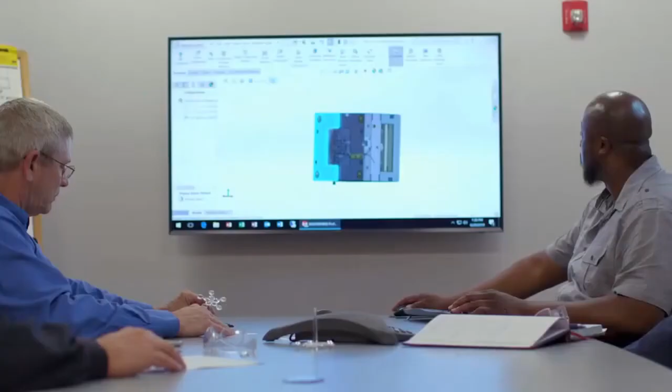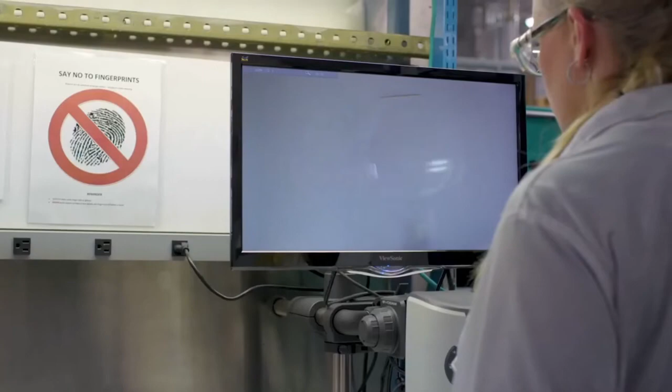Thank you for reviewing this presentation by GS Plastic Optics on design for manufacturing. The unique nature of injection molding demands a very disciplined approach to component design. To be successful, developers of optics-enabled systems need a comprehensive understanding of manufacturing process capabilities and inspection equipment available to test polymer optics. In this presentation, we offer a manufacturer's perspective on the complex interaction between thermoplastic resins, molds and molding equipment, and metrology involved in manufacturing plastic optics.

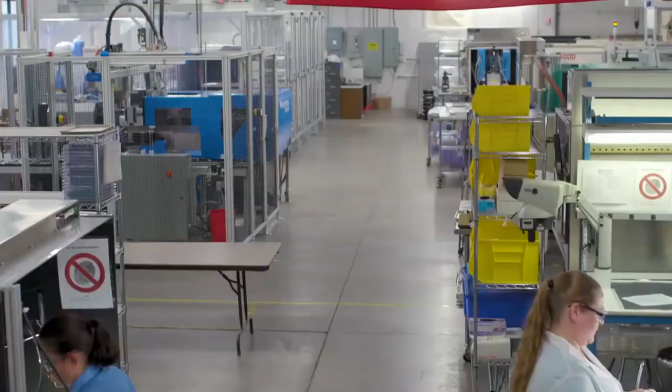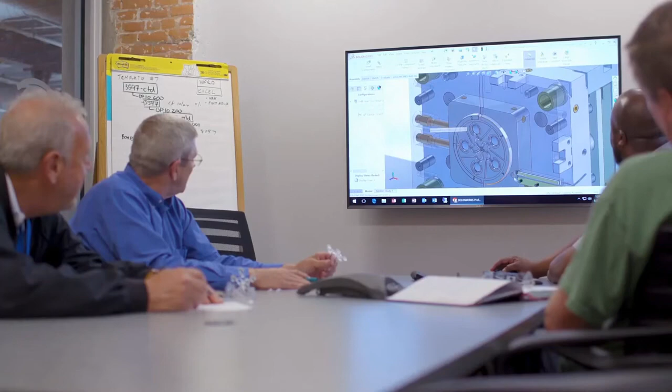Let's start with the introduction of GS Plastic Optics. GS Plastic Optics is a global leader in precision injection molded polymer optics. We provide the enabling components of optics-based devices for medical, defense, machine vision, and augmented or virtual reality markets. We work with optical engineers and program managers to solve complex optical problems using plastic substrates. The result is a competitive product that maximizes our customers' profitability while reducing program risk.

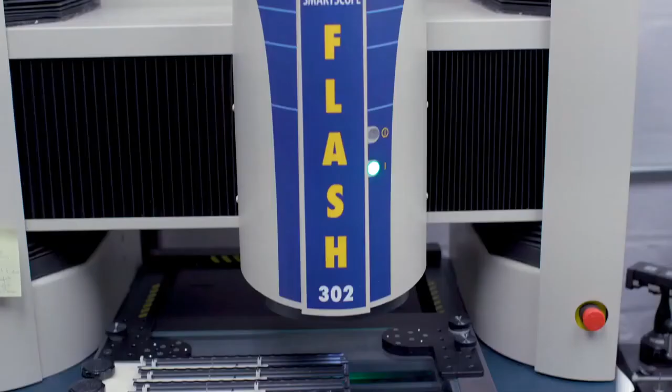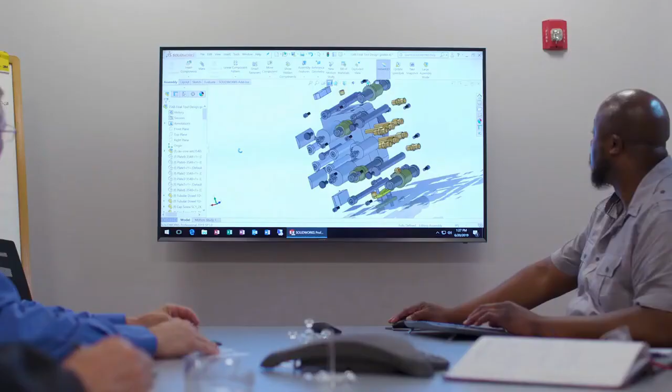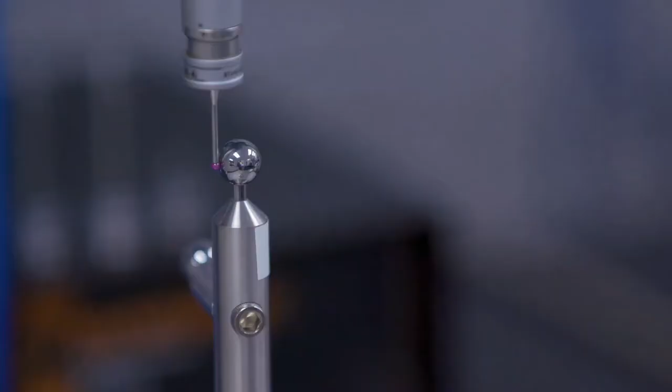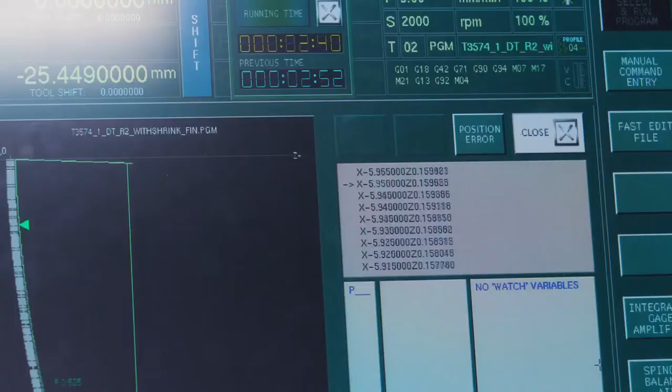Manufacturing capabilities in our vertically integrated factory include expertise in many critical areas: injection molding of precision optical and mechanical components, mold design and flow analysis by our process engineers and scientific molding experts, robotic parts handling systems providing cost control opportunities and 24/7 production, state-of-the-art metrology to ensure conformance to optical, dimensional, and coating specifications, single-point diamond turning machines used for optical mold inserts, prototypes, and low-volume production, coating chambers for application of custom mirror and anti-reflective coatings, and optical assembly in our Class 10,000 clean room.

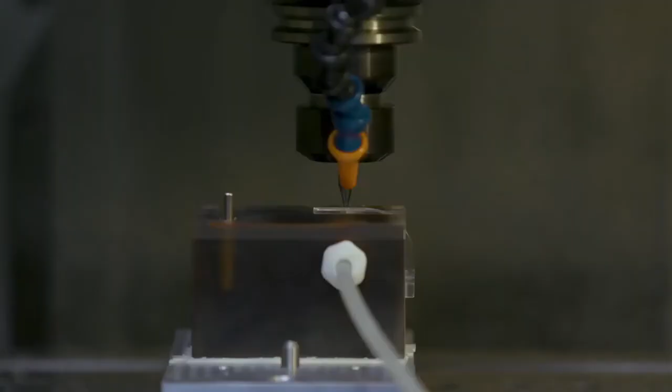The GS Plastic Optics team is proud of our 100-year legacy providing innovative precision plastic optics solutions right here in our Rochester, New York factory. Visit gsoptics.com for more information.

In the course of this presentation, we will review the advantages of plastic optics, discuss selection of thermoplastic resin, explain how the molding process works, demonstrate the online resources available at the GS Plastic Optics website, provide guidelines for designing for manufacturing in plastic optics, review quality system and metrology methods appropriate for plastic optics, and discuss best practices when working with a polymer optics manufacturer.

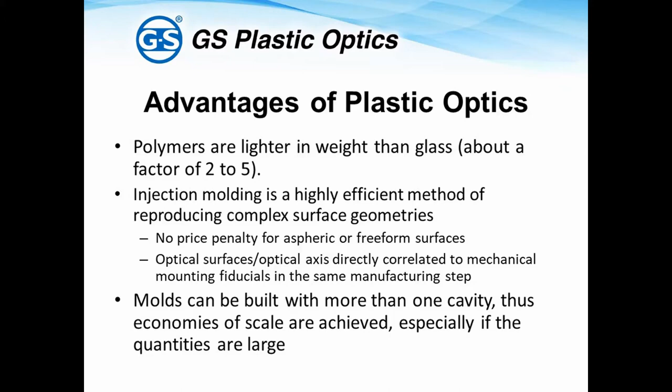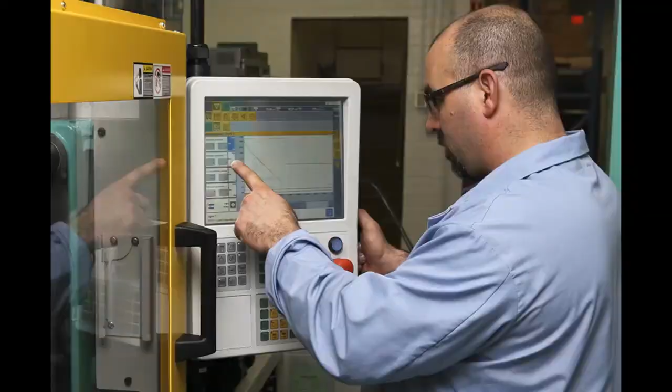Design advantages of using injection molded plastic optics over glass include significant weight reduction, the ability to include multiple optical and mechanical features into one part, and the ability to produce large volumes of highly symmetric parts. These advantages can be realized only when the designer is fully aware of the mechanical and optical properties of plastic materials, has good understanding of the injection molding process, and is well familiar with the methods to assure that products are manufactured within the specified parameters.

To select the right material for polymer optics, the designer should carefully consider all properties of the thermoplastic resins and how they are compatible with the target application and system performance requirements. Acrylic is one of the most commonly used optical plastics. PMMA polymers are relatively hard and have good mechanical stability. Acrylic is also known for its very good clarity and excellent transmission properties throughout the visible spectrum. However, it has low operating temperature.

Polystyrene is generally less expensive than acrylic. The material also tends to absorb somewhat in the deep blue spectrum. Polystyrene has a lower resistance to UV and is more easily scratched than acrylic. A styrene lens, when paired with an appropriate acrylic lens, offers an effective achromatic solution. High contamination is a potential issue for molded polystyrene optics.

Polycarbonate is known for its high impact resistance and the ability to perform over a wide range of temperatures. Because of its high ductility, polycarbonate optics are not easily machined. The resin is more expensive than acrylic.

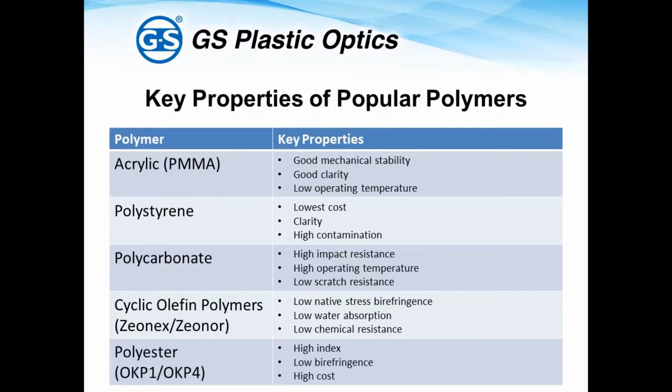More information on materials for polymer optics can be found online at the GS Optics website, www.gsoptics.com. Selecting resources, technical documents, and then properties of materials will bring up the page with links to several PDF documents. One of them is Mechanical Properties of Commonly Used Thermoplastics, which lists coefficient of thermal expansion, operating temperature, water absorption, and specific gravity for optical plastics.

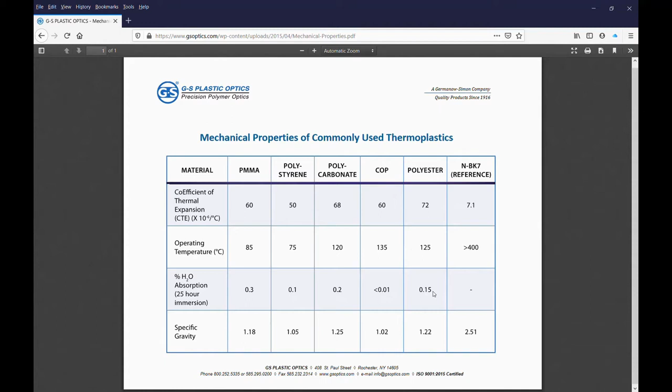Optical designers should note the high thermal expansion of thermoplastic resins—about an order of magnitude higher than glass. Thus, maintaining focus over a wide temperature range is a significant problem. They should also consider maximum sustained operating temperature and water absorption of the selected materials to make sure they match the product application. The optical properties of commonly used thermoplastics document includes index, Abbe number, dn/dT, transmittance, and birefringence data.

Thermoplastic materials have a fairly narrow range of index of refraction, from 1.49 for acrylic to 1.61 for polyester. It's important to keep in mind that polymers will exhibit a change in index of refraction relative to temperature. The thermoplastic dn/dt is fairly large, about 20 times that of glass, and negative. As the temperature goes up, the refractive index goes down.

Some materials, such as polycarbonate and polystyrene, have a high amount of stress to begin with because of their polymer properties. The amount of birefringence in an optic can be exacerbated by poor part design or poor gate location in the mold. Technical documents also include transmission curves.

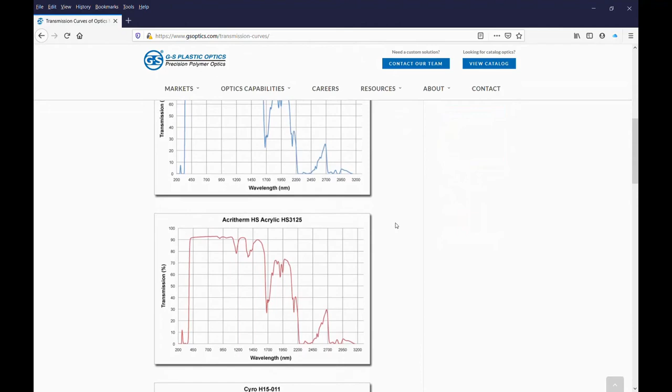Most optical plastics have high clarity in the broadband visible to near-infrared portion of the spectrum. Individual transmission charts for a large selection of thermoplastic resins can also be found at this web page.

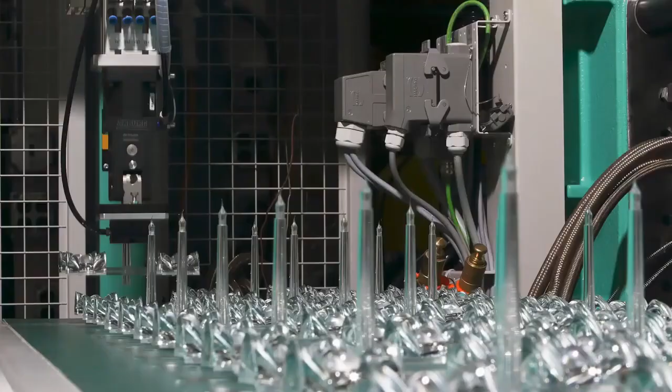One key advantage of polymer optics is the ability to combine optical and mechanical features onto one platform. Mold allows for that to happen. It contains the negative features of the overall shape of the optic, along with any mounting features. It also contains the optical inserts, diamond-turned, plano-polished, or hand-polished, against which the optical surfaces are formed.

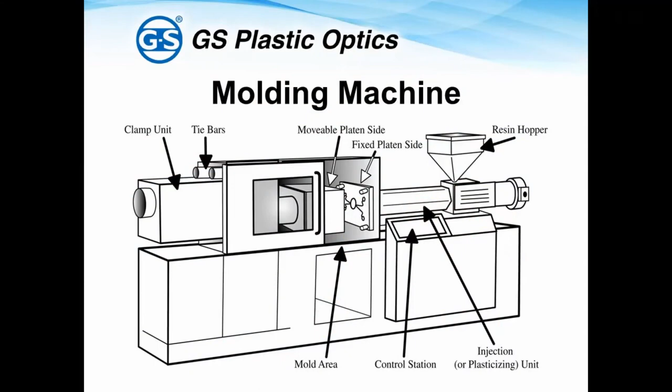Molds for plastic optics are specially designed and built to allow producing precision optical surfaces with high dimensional accuracy and uniformity cost-effectively. Molded optics are produced in the injection molding machine or press, which holds the mold, plasticizes the resin, and injects it into the mold cavity.

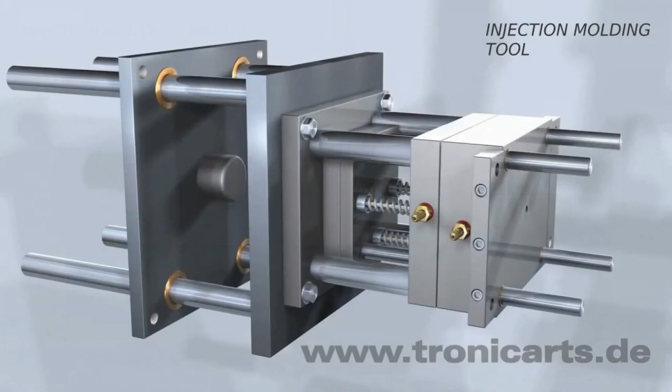One side of the mold is mounted to the fixed side of the press. The other side is mounted onto the movable platen within the press. During the molding process, the two mold halves are clamped together under high pressure. The molten resin is injected into the mold by the press.

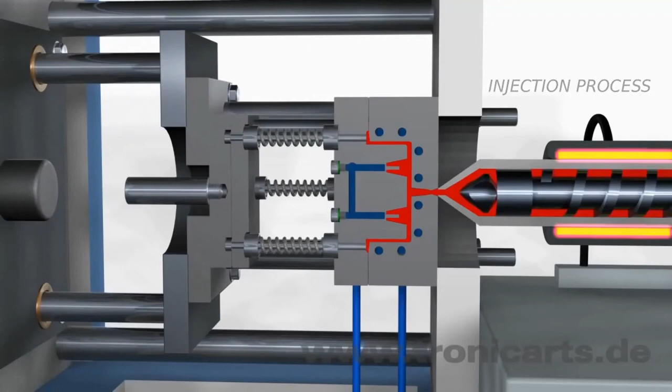The melt moves through the channels into the tool to the cavities. The cavities fill with the resin and take on the shape of the cavity detail. Once the plastic has cooled to an appropriate temperature, the mold opens and the optics are removed.

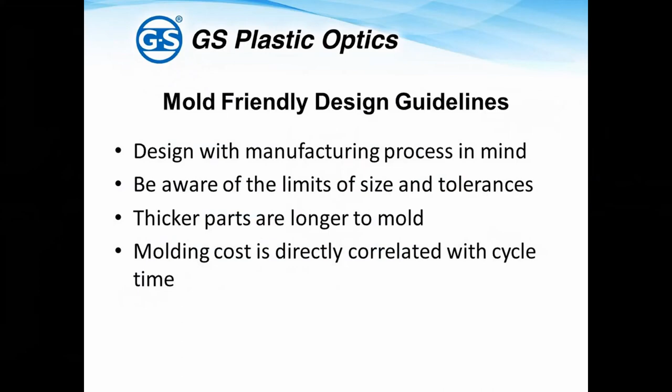Injection molded optics should be designed with the manufacturing process in mind. The designer should be aware of the limits of size and tolerances that might be expected of the finished optics. In general terms, overall shape and tolerances of the optic will drive cost and manufacturability. There are some general guidelines.

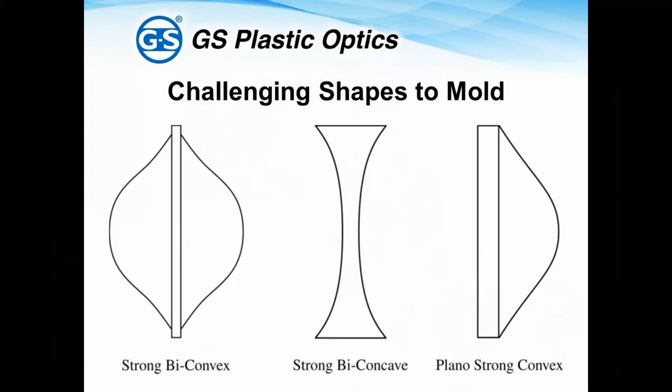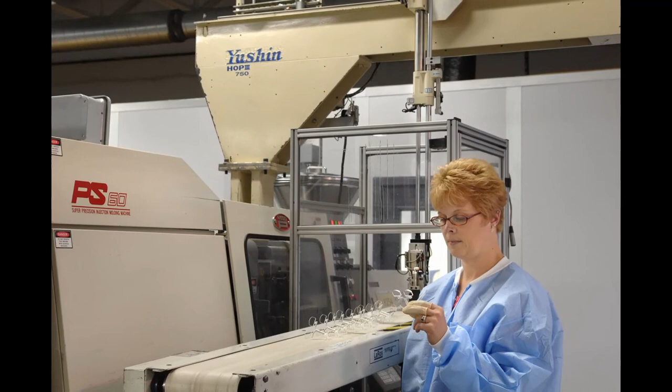Thicker parts take longer to mold than thinner parts, and optics with extremely thick centers and thin edges are very challenging to mold. On the other hand, a thinner optic presents fewer shrinkage compensation issues and shorter cycle times. Molding cost is directly correlated with the cycle time, which is in turn driven by part thickness and complexity.

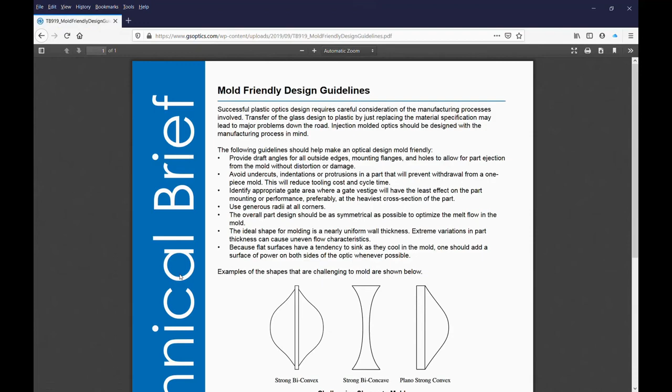The technical documents section of the GS Plastic Optics website contains a technical brief on mold-friendly design guidelines, which includes recommendations on making an optical design manufacturable. Also, it contains capabilities sheets listing manufacturing standards for injection molded optics.

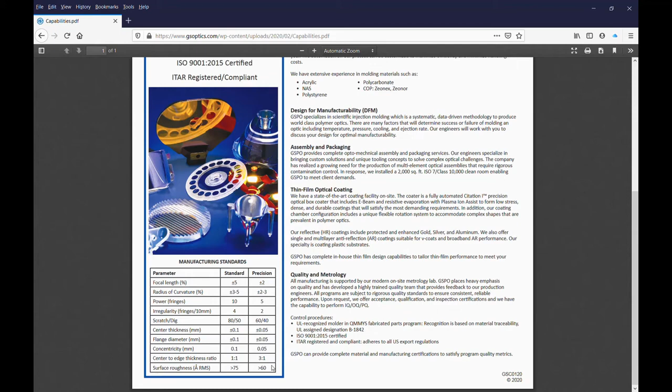This table provides a rule of thumb guide describing the limits of fabrication in an ideally designed optic. In the meantime, each part needs to be evaluated on an individual basis. Having good metrology is an absolute requirement when molding optics.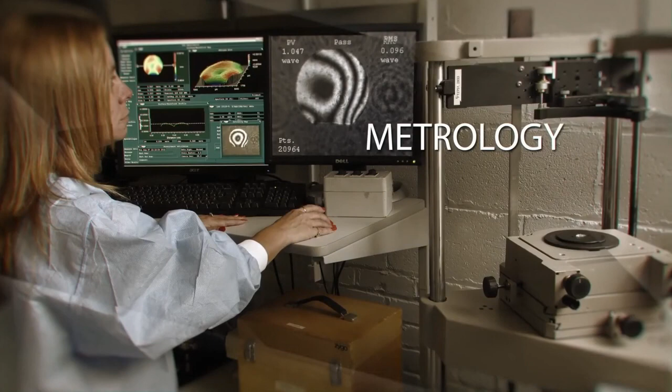Most optical surfaces can be tested on an interferometer. If the surface is aspheric, null correctors can be designed and employed. Another useful device is a contact profilometer, which can be used to trace aspheric surfaces and measure form errors.

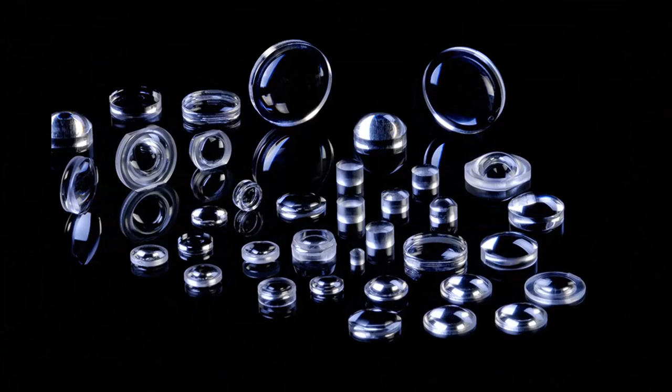Because of the common practice of integrating mechanical and optical features into one platform, appropriate metrology is required to assure these features are to print. A coordinate measurement machine is useful for this application. This is especially true if the molded optic has optics in multiple planes relative to a datum.

Since injection molding is a volume-related process, the use of functional test equipment is often required and can be tailored for the program needs. Functional testers allow for a go-no-go assessment of the process in a timely fashion.

Best practices for a successful program using polymer optics include the following steps: development of preliminary specifications, initial mechanical and optical design concept, and acceptance test criteria.

Selection of a reputable optical molder to develop manufacturing strategy, including prototyping plan, ramp up to production schedule, and packaging requirements. Design optimization with guidance from the optical molder's engineering team.

Development of final product specifications and acceptance test criteria, including 3D CAD files and 2D drawings with all optical and mechanical tolerances. Development of QC metrology strategy, including specialized inspection requirements and functional test setup.

GS Plastic Optics has developed a process of assisting our customers with implementing plastic optics solutions. We begin each project with a fit assessment process to fully understand your business objectives. We review your product program, market and growth potential, and profitability goals.

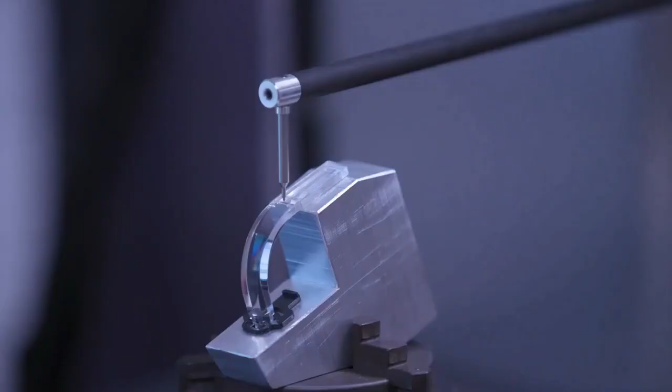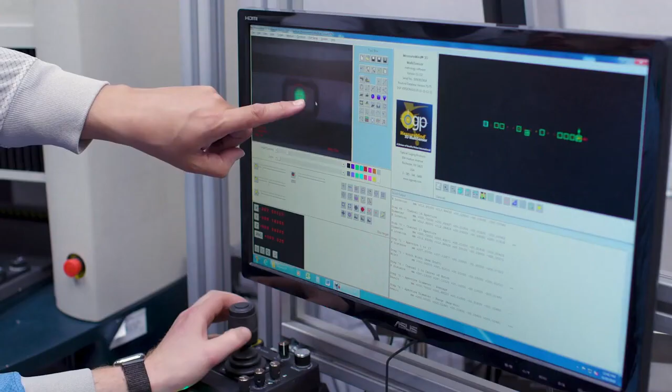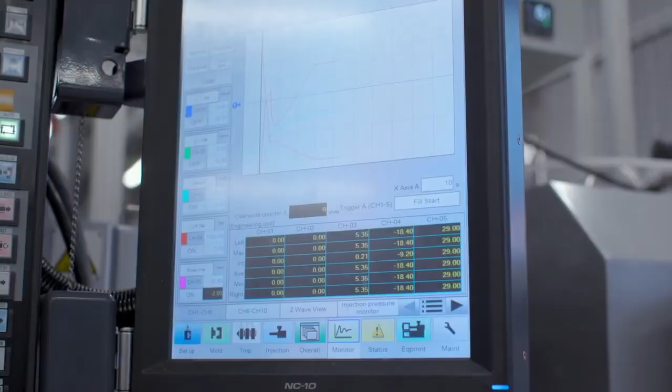This process aligns GSPO staff with customer staff to ensure the project is appropriate for molding or diamond turning, and the dimensional and tolerance requirements are achievable. We will verify that we can meet the customer's business objectives and schedule. Upon completion of the fit assessment, we provide a carefully planned proposal confirming design and quality specifications, reflecting cost goals and turnaround time.